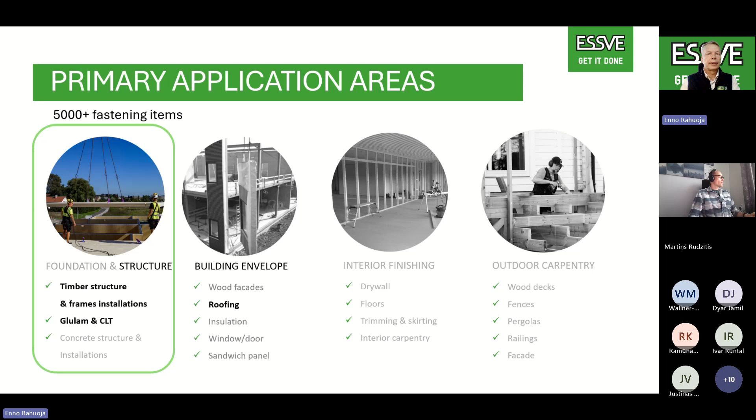Markus is, since already 2013, a guest professor in Brookes University, Oxford. He's an FH professor since 2020. And his knowledge and deep experience is on fire and timber structural connections.

Hello, nice to be here. Yes, super, I can hear you too.

Markus' previous subject was thermal insulation, so this is the picture we talked about in May, and we released one sample Excel tool which helped to calculate. Today we will bring up another Excel software which helps you to calculate, and Markus will make a light overview on that.

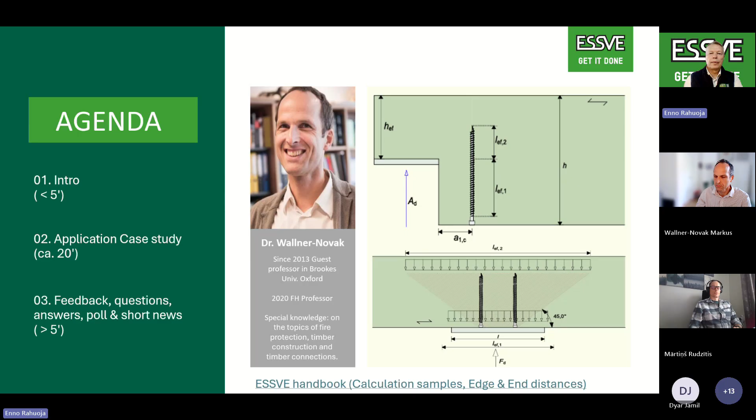So we'll touch on notch applications and also reinforcement on the support side. About ESSVE's own software, just a reminder that we have SWOOD.

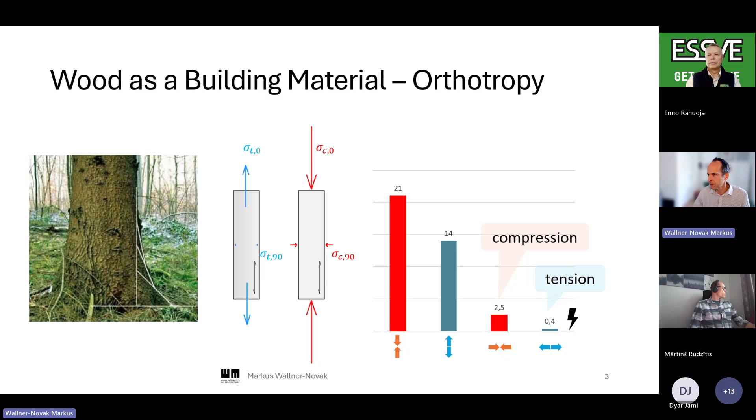So that's one principle that we always have to have in mind when we use timber and construct with timber. The idea is, wherever there is a weak point, we imagine having a crack, and then we add screws for reinforcement to avoid this crack and to transfer the loads, like in this notch example here.

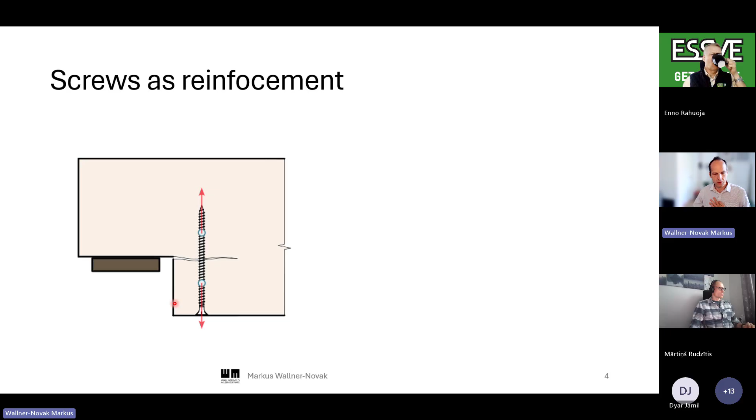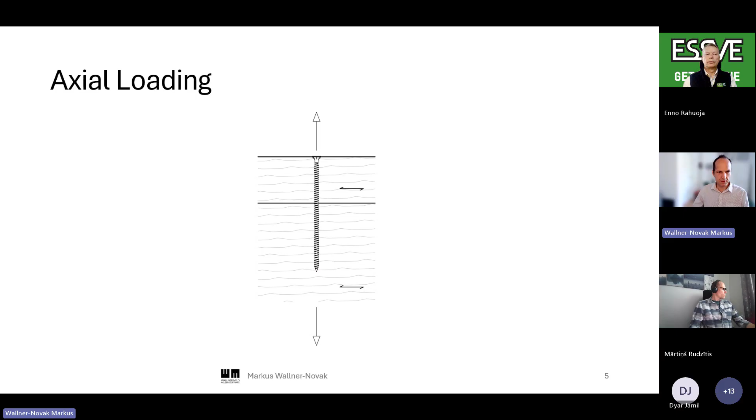If screws are loaded axially, they are very stiff. The development and optimization was long going on, and now ESSVE has very optimized screws for self-drilling, and the thread geometry and everything is pretty much optimized for as low moment as possible, but as high tension capacity as possible.

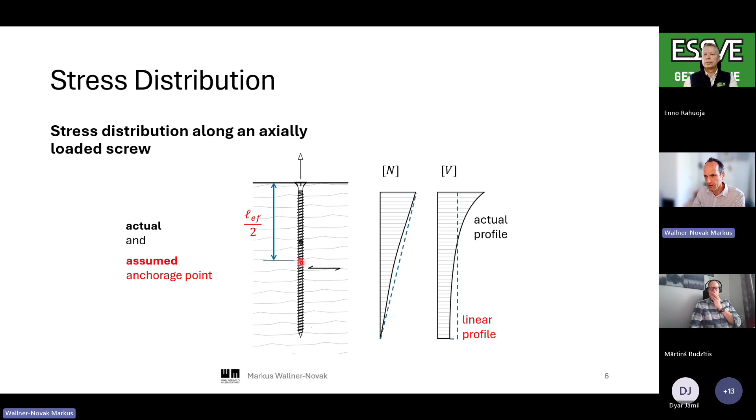The engineer's model usually is that the realistic load transfer, the shear, is interesting. How the shear is transferred from the screw to the wood is not really linear, but we assume that at half of the thread, the anchorage point is. This is an engineering model that sometimes, if we have a look at the screws in detail, we use.

It's like a little truss. So in the center point is the anchor point, and as the stiffness for transverse loading is relatively low, it's only one tenth of the actual stiffness. We have this pendulum beam bar that we use as a model usually.

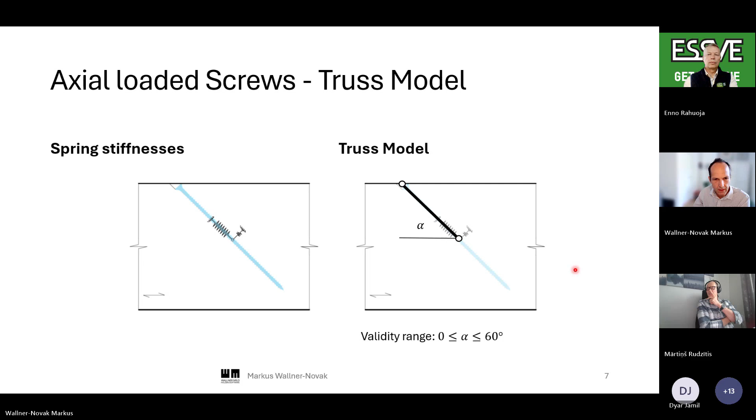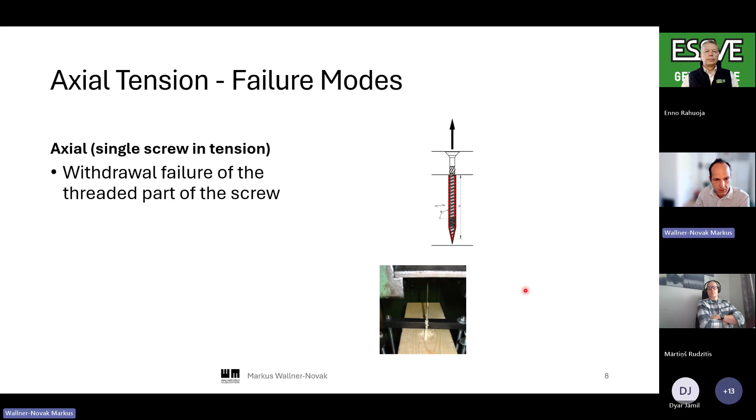What can happen is also an engineering task, to ask what happens before it really happens. So we think about it, and then we design so that it doesn't really occur. One thing can be that the screw is torn out completely, so the thread is withdrawn. Then we can have the head pull through.

That depends on the application. It's not really important in some cases where we have two threads in two different members of wood, but sometimes if the member is not wide enough, then we have this case. So this is not always the case, and then usually it's not really governing, but we can have a tensile failure of the screw as well.

It's usually near the head, because there we had the most shape-changing parts in the production. So this is usually where, if it breaks, it would break somewhere around here.

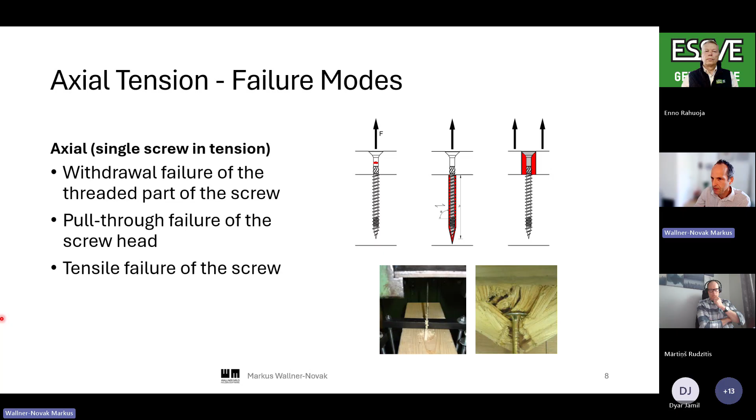So this we know now as a basis. And then there is another thing we have to consider sometimes, that's for the supports, might be interesting: that is the buckling of the screws.

So they are embedded usually in timber, and this is quite a good situation for the buckling lengths. It's not really a high buckling problem, but we have to consider it, and that's another design check that we might have to use.

So these are pretty much the basics in a quick run of the screws, besides the optimization of all the geometry and the tip and so on.

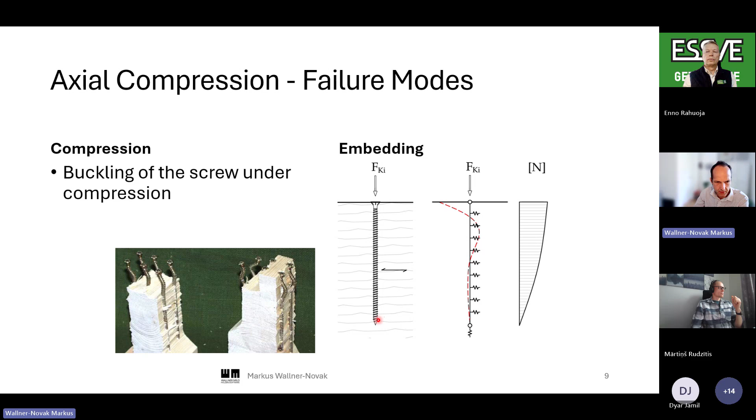Then the design idea is the same as we saw before. There's one thread length below the crack and one thread length above the crack, and whichever is smaller governs usually, and the load has to be transferred from the top to the bottom side.

From the theory and also from tests, we have a semi-empirical formula depending on the notch depth, how much force occurs in this crack theoretically, and how much has to be transferred. That's the design provision we make.

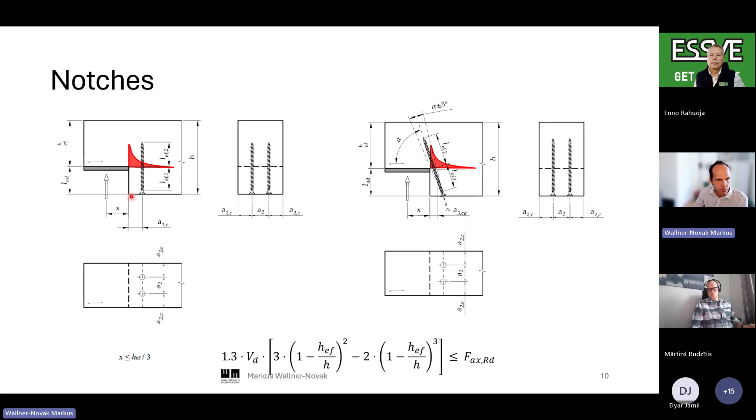But still, it can be even better for the structural behavior. With very high loads, it can improve the structural behavior, because the crack stresses are very strong, very high at the starting point and then decrease rather quickly. But usually the application is this one, and the distance is kept as close to the end grain as possible. That's our main distance here.

And the second application are the support reinforcements, where we add screws because the second weak point is the compression perpendicular to grain. We know this, that sometimes in earlier times we had additional width glued onto elements where the loads were very high at the supports. We tried to increase the beam width, or we had to increase the column length or width to have a longer support.

To save wood here, it's a good option to have screws that transfer the compression into the wood at about a 45-degree angle. This is the estimated stress distribution - you bring in the load by the screws, and then you have a second compressive horizon up at the tip of the screws. So you increase the load capacity by widening this compressive area, so to speak.

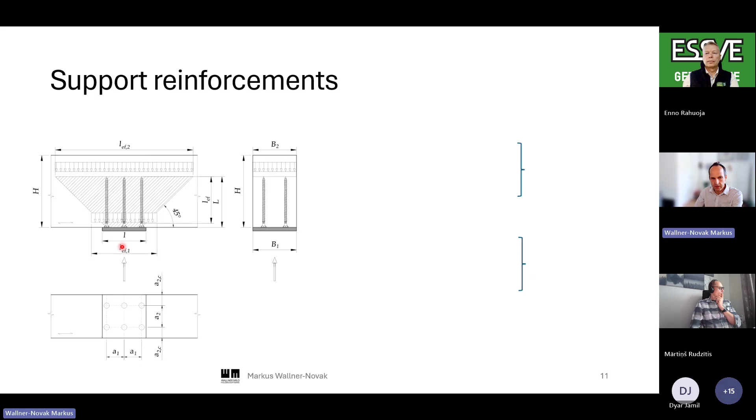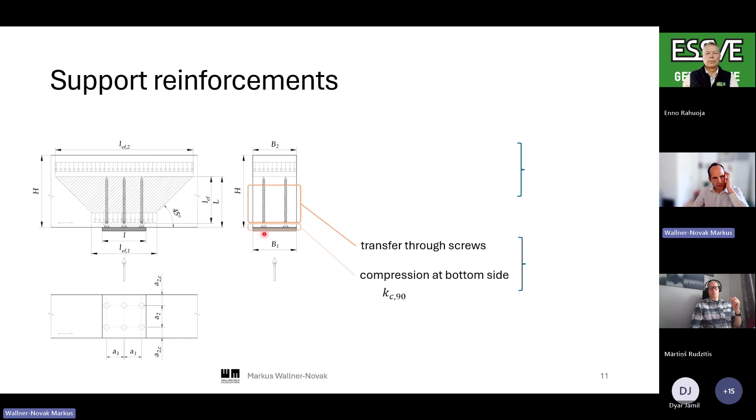And then if we have a look at the engineering design check chain: first the load has to be checked without screws at the compression from the load bearing, then we transfer the loads through the screws inside the wood, and finally we check the design at the screw tip. Whichever is smaller of these two governs the design.

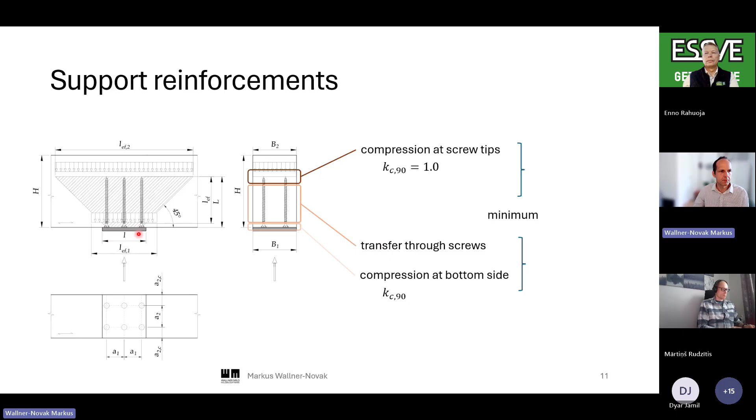The screw plate here is just touching the heads, because the compressive force should be transferred equally in all screws. That's the reason there is a plate - so that the screw heads should be within plus/minus 1 millimeter position, and then the plate helps transferring the load. It's only for position securing that there might be a very small screw, or you could also have the column sunken in, the plate sunken for fire protection. Sometimes this happens so that the position is fixed, but otherwise it's just a contact here.

I will show two examples in a few minutes, one notch and also one support where we can use cylinder head screws.

A general note, this is a different situation - this is the end support. Then you don't have the full spread of the load up to the tip, but a limited one because the end grain is here. That is clear, and here is a diagram I made once with a comparison calculation.

If you have a beam with 16 centimeters width, you can increase the support load transfer by about 60%, so you get 1.6 times the capacity of a support if you use 5 or 6 screws - in this case it was 6 screws screwed in.

Also as a provision, if we have compression and want to transfer load into the wood, it's about 20 or 30 times the diameter to transfer the load in. If it's longer, it doesn't work anymore because the buckling of the screw governs then. So you can keep in mind that 30 times the diameter is about a good length for screwing compression.

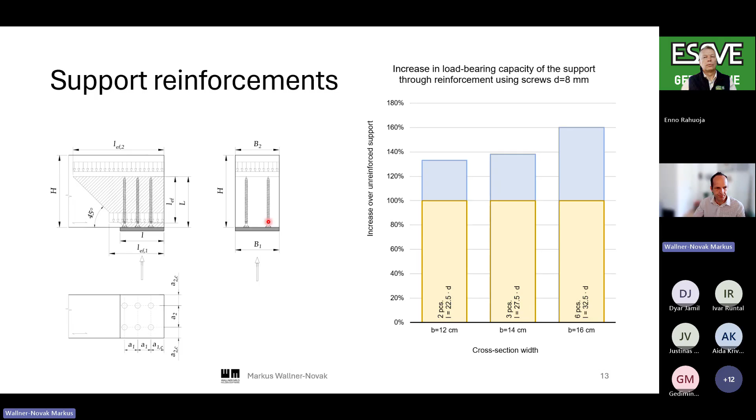And then there's just one final thing about the spacing - you can look it up in the ETA. It's just a hint that in the ETA document, the European Technical Approval, you will see that the distances are much smaller than in the Eurocode, and that often helps in designing screws and providing a good engineering solution, because if you can pack it more densely, it helps increase the capacity also.

So yes, this was about the theory, and to come into practice, I want to show you the design examples we discussed and provide. So we have this Excel solution for the screws, and I start with the notch.

We said we want to have a beam that's 32 centimeters in height, and we do a notch that's half the height, so 16 centimeters. I tested it before - we can try with 20 kilonewtons reaction force on this side, and with this geometry the program calculates that 13 kilonewtons have to be transferred by this crack.

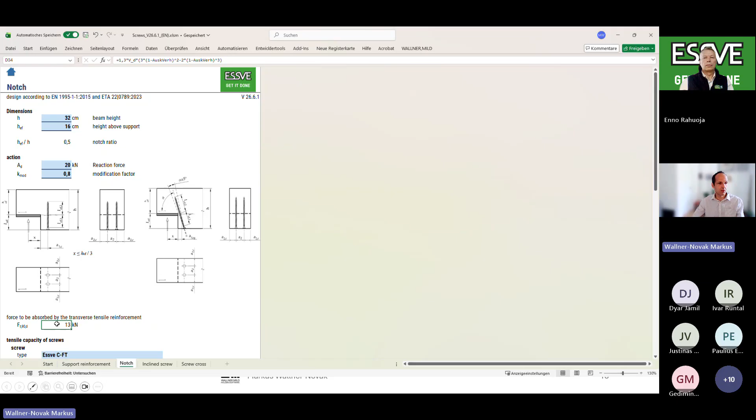It's not valid usually, and as an engineer we discussed this also - you'd think that if you consider shear, the shear part in the lower part has to be moved up to the upper part, and the shear stress sums up to the crack, but that's not enough because you have this non-linear crack geometry and cracking stress. So it's higher - you see it's 13 kilonewtons while the reaction force is 20. So it's higher than the sole shear, because then it would be 10 kilonewton if we split the cross section in half. So it's higher than this.

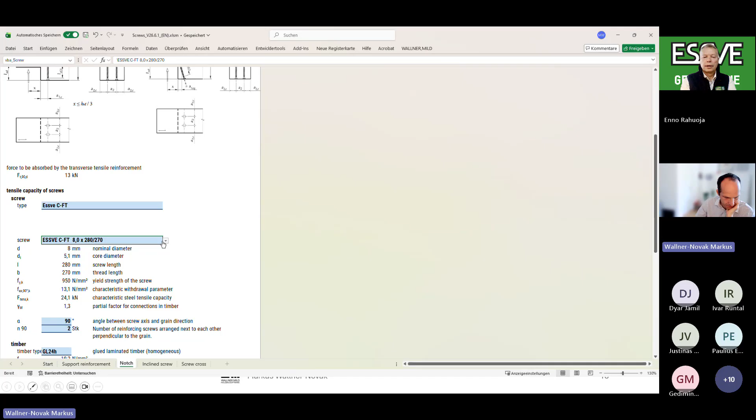And then we can select a screw. We have all different geometries and variants. I'll stay with this one, with the cylindrical head, and I can also use about 280 so we can check if this geometry is good.

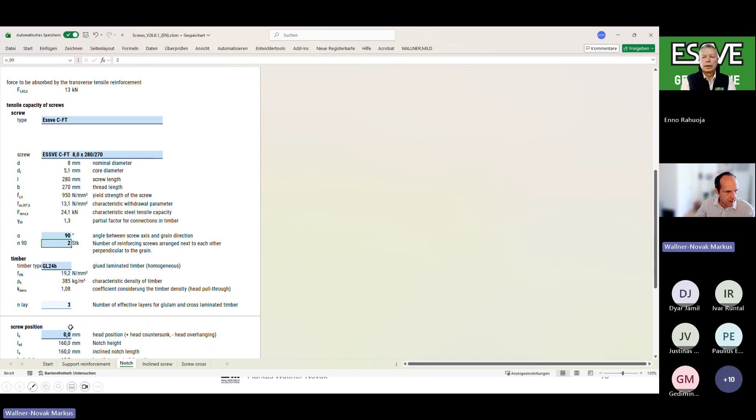The angle, as we said, usually it's 90 degrees, and timber is glulam. And the screw position we could change, sometimes for fire reasons and sometimes for visual reasons, or if the beam is very high, we can sometimes sink it in. We have a countersunk screw. We could set this here, and then the program calculates what's the effective length in part 1.

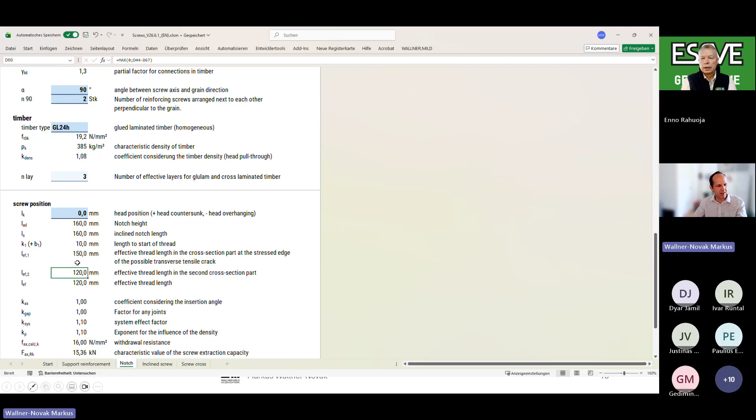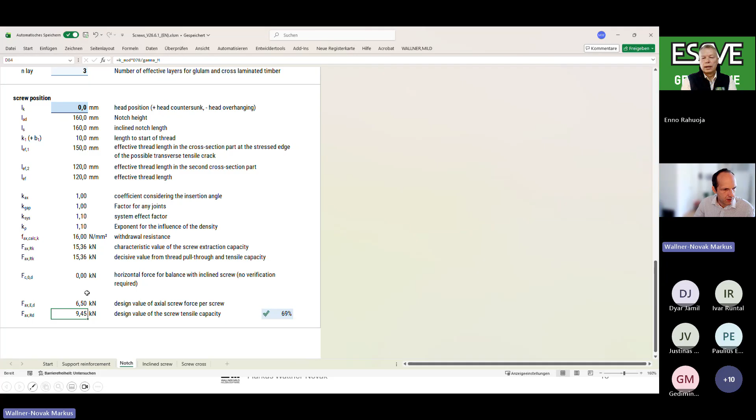That's the lower bit below the crack and above the crack. So we have these two lengths. We could do a little bit longer if we need, but we see that 69% is the factor. So we are safe, and we get the design capacity quite well.

And the second example is the support reinforcement. I also just enter the dimensions first. 16 by 32 centimeters glulam beam, and now we have much higher force. I go up to 150 kilonewtons to show what the capacity is, and we get here, if you have a look, the compressive strength without reinforcement would be 152%

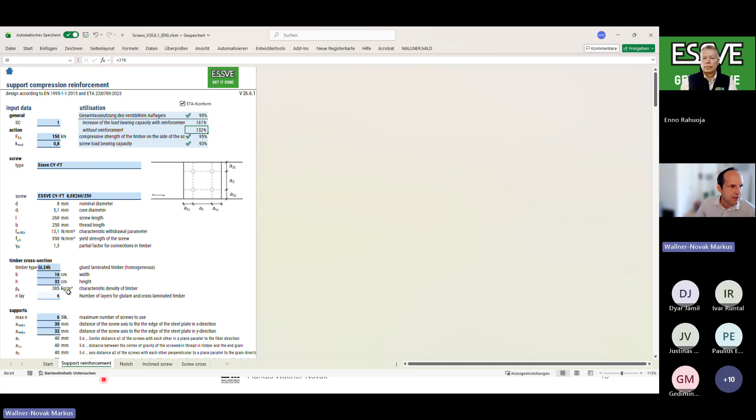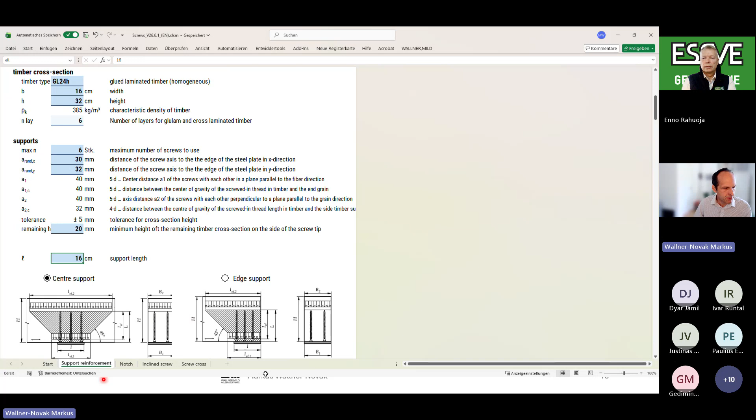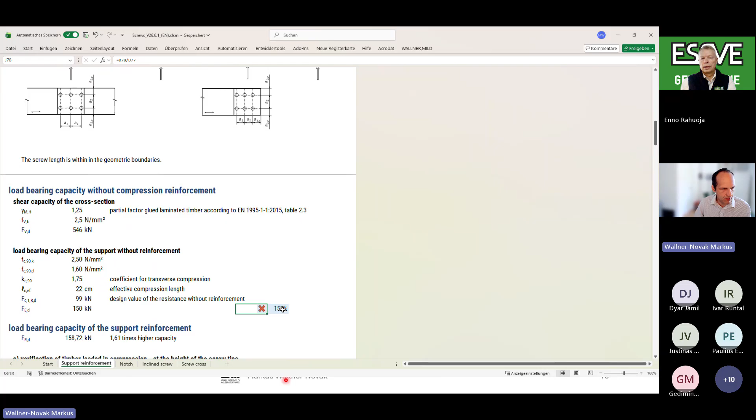overstressed. So if we add screws to the support, we can enter the support length here. So if we assume that the column where the beam is positioned on is 16 by 16, then we have 16 centimeters support length, and the program then checks the shear capacity of the cross section, and then the capacity of the support without any measures. It's overstressed. And then by using the screws, the program calculates the minimum number.

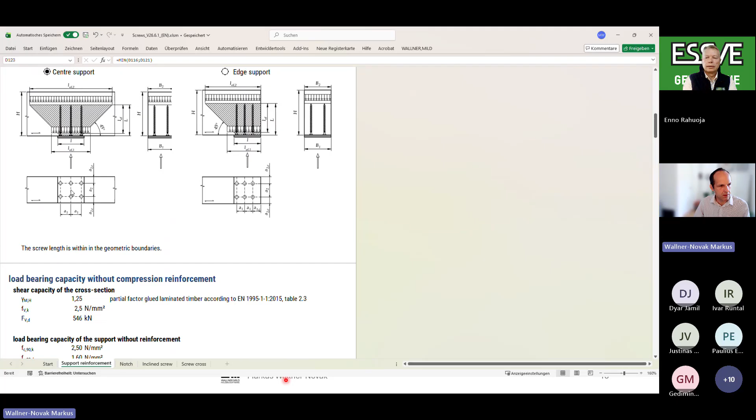It's 5, so there's a sketch up here. Instead of 6 in this sketch, you could just use 5. That looks like a 5 on a dice. So we have 2 here, and then just 1 in the center. By using 5 screws, diameter 8 millimeters that were set up here, and 260 in length, then the capacity is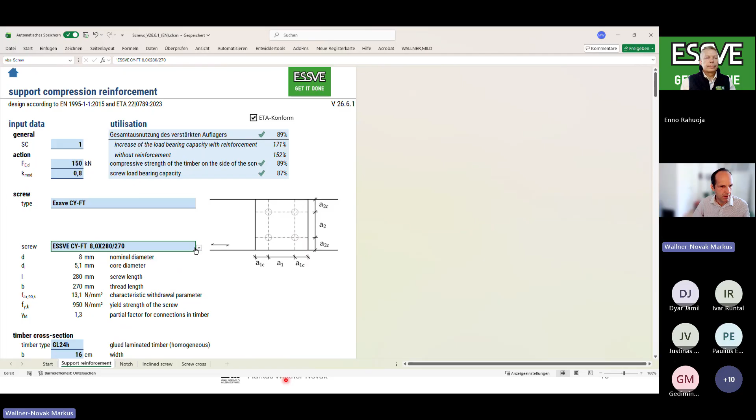reached. If the screws are shorter, the capacity will probably not be reached, because then the transfer to the tips is not enough, and we have to increase the length to about 260, 270. And if we go much longer, it doesn't pay off, because then it goes through the beam, but the buckling then governs. So usually the length is limited at some point.

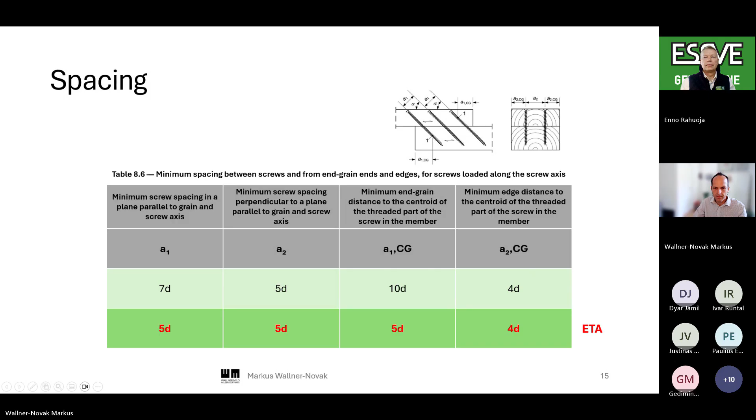Yes, so I hope I didn't overstress time. Let's go back to the slide here. These are the two examples in quite a quick run through, but I think that's the 20 minutes we wanted to use to give you a short overview. And it's always an engineering thing. If you have to deal with the problem, there might be some more questions, and we are ready to answer them right away, and otherwise on request, Enno will be there to help you out, I'm sure. Yes, so this is my overview.

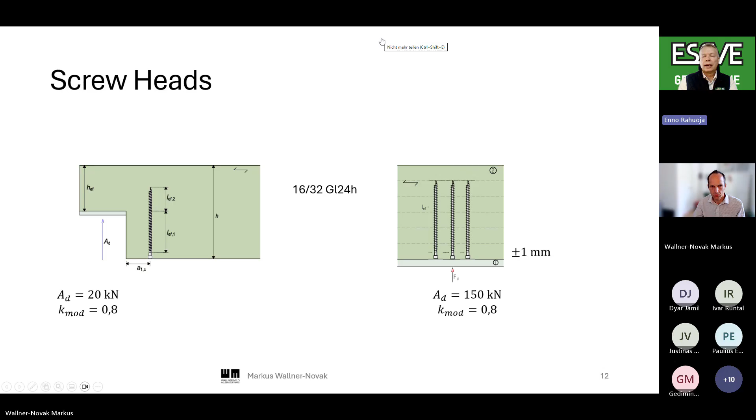I see Martins has written: hello, where can we find the Notch Excel sheet? The Excel sheet is not yet uploaded to our website, so as soon as we have done the upload, I will send a reminder to all who participated today. It will be in the same location as the TimberTech info in 3 languages, Estonian, Latvian, and Lithuanian.

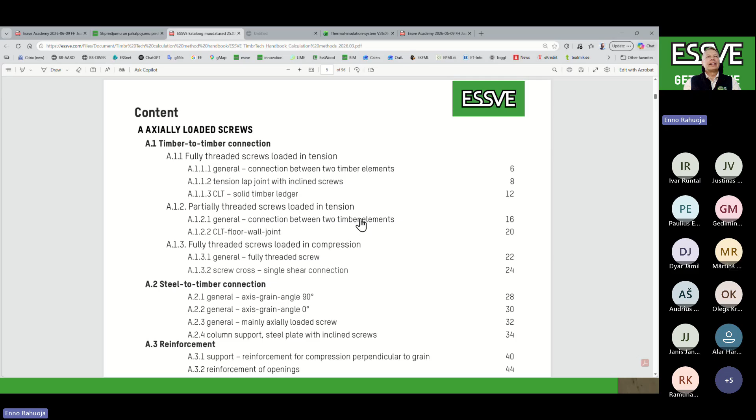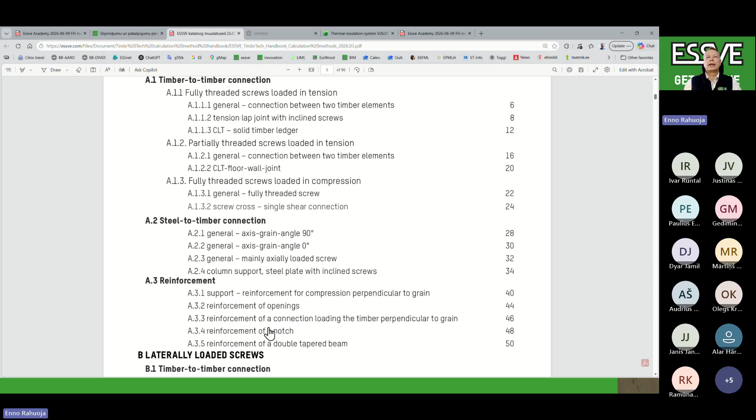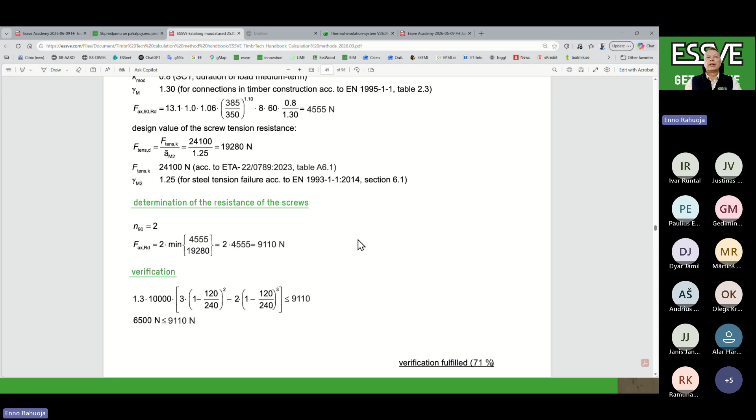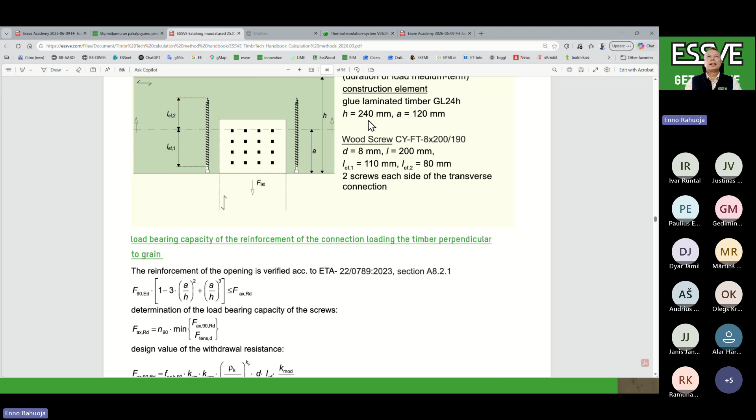But here you will find the content lines, and the content lines are related to the pages. For example, the notch is on page 48, and on 40 was the support. So if you click on 48, you will find the theoretical background, how to calculate it. And here is the model of the calculation to get the result. So here are practical tips and samples, and you will find similar ones for other reinforcement applications as well. But as the internet is lagging a bit, I'm not going to spend time here, that's just a tip for you.